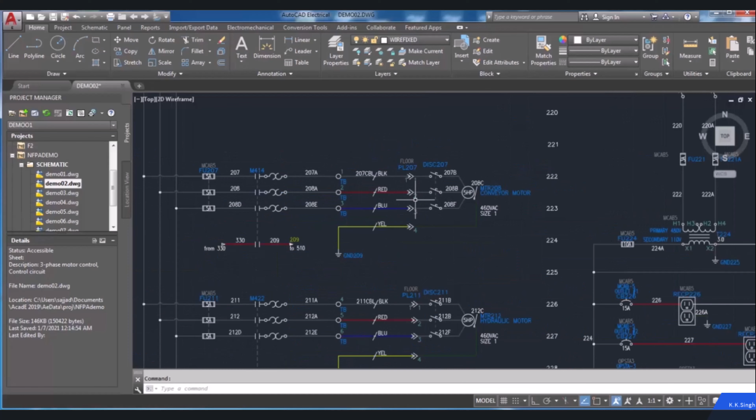I'm going to focus on essential tools to create drawings in AutoCAD Electrical. AutoCAD Electrical is one of the most widely used tools for creating industrial drawings. By using the features included in AutoCAD Electrical software, you can easily draw all kinds of components and parts of electrical circuits.

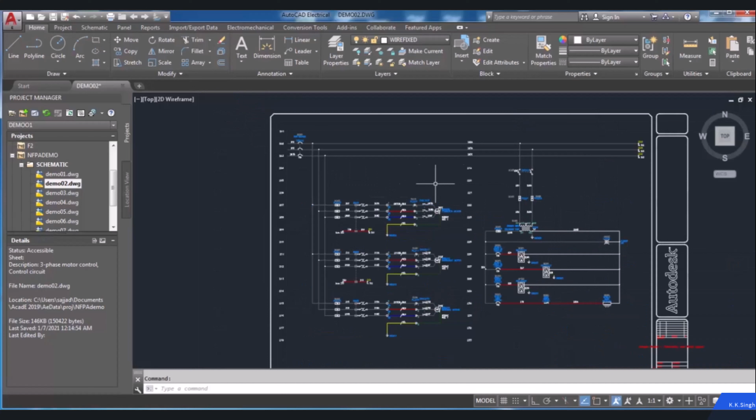This course is divided into several parts, and each part provides detailed explanations. First, we will cover the interface of AutoCAD Electrical. After that, in section two, we will learn about working with projects and drawings, how to create projects and drawings and work with them.

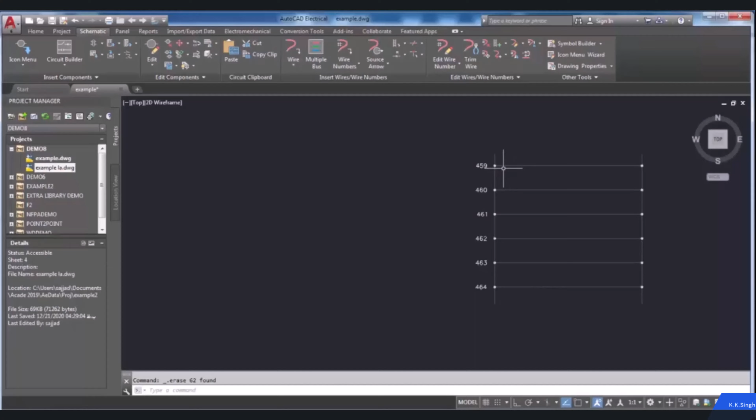In the next part, wire and wire number tools and how to edit or modify them, also using signal arrows and cable markers, will be explained with examples. After that, we will learn how to create, layer, and modify shapes in the next section. Some needed tools in the draw panel for creating these shapes will be presented, along with working with status bar components.

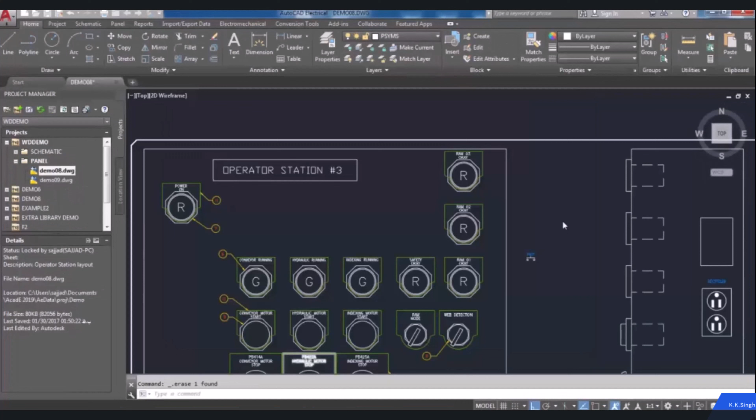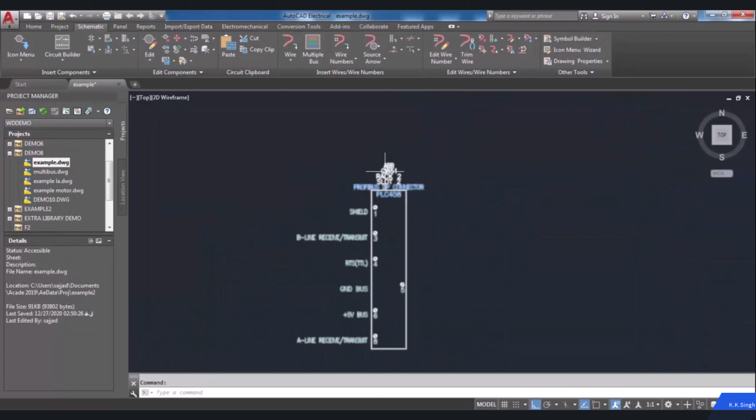Editing them, and also using parent and child components, will be covered next. After that, creating panel footprint drawings and editing them will be provided. You will learn how to work with connectors and circuits and modify them. Working with terminals and editing jumpers will be explained, and the next section covers using PLC modules and editing them.

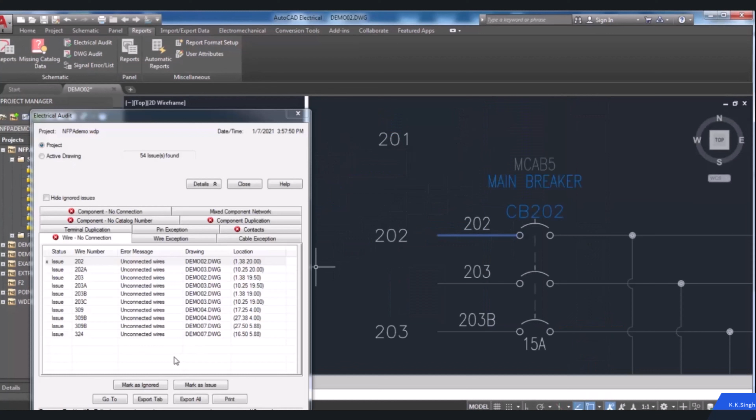After that, we will present creating new symbols and how to add them. Also, we will learn how to update title blocks. Preparing a report consisting of different information in your drawing will be explained. Also, plotting the drawings and applying the related tools will be provided, and by the end of this course, you will be able to create your desired drawing.

AutoCAD Electrical consists of tool sets that help electrical designers create circuits, panel drawings, wiring, and other electrical drawings. To get started with the software, first I'm going to show you how to open a new drawing and explain the other parts of the software for creating a new drawing.

And if you want to use metric measurement criteria, you can select the metric template. At this time, I'm going to select this template, so I choose it, and then a new drawing will be opened.